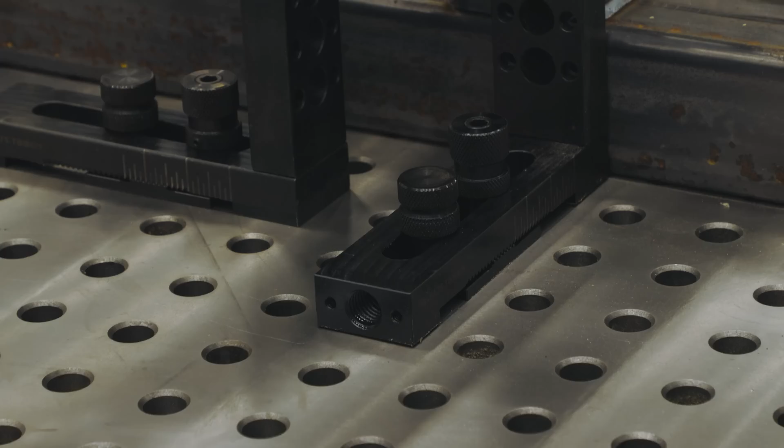Welcome back, everyone. This is part 2 of fixturing a picnic table. As you can see, I have the whole thing fixtured up, and I want you to take a real quick look at it. It's pretty wild looking, might be a little confusing, but I assure you, I'm going to show you where every fixture goes and why I put it there.

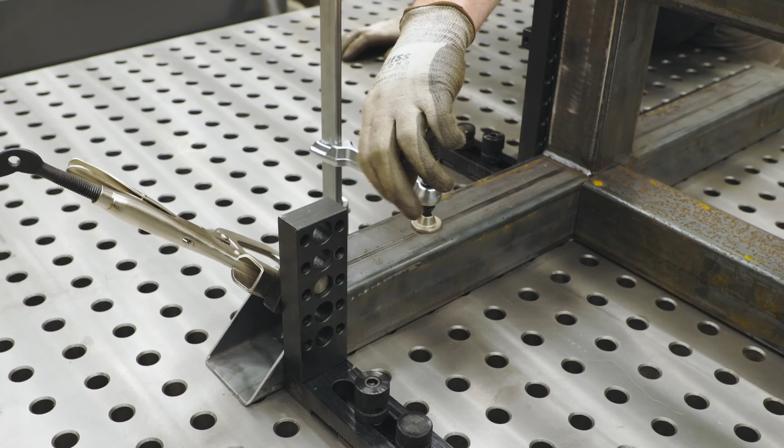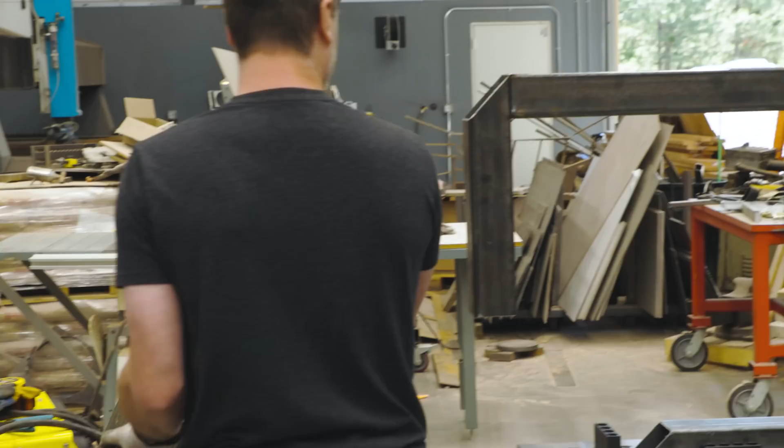So let's take this thing apart. If you haven't watched part 1 of this fixturing of the picnic table, I highly suggest you do that because I cover a lot of basic stuff in that video. In this video, I'm going to be really talking about going up, getting off the welding table and how we're going to deal with that problem. And also, if we have a weldment already that exists, how do we locate that?

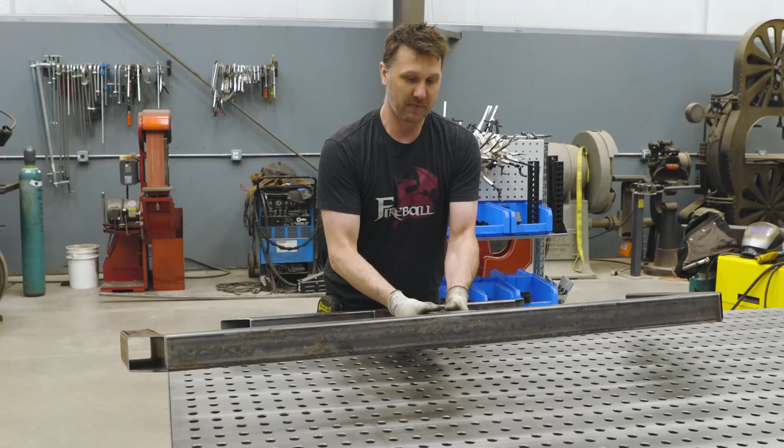Okay, put this guy on the floor. So where should we get started? This is the frame that I built in the last video. I built it flat on the table. And it actually goes like this when you go to sit on it. Your butt sits here, the tabletop sits here. But I'm going to actually fabricate with it upside down.

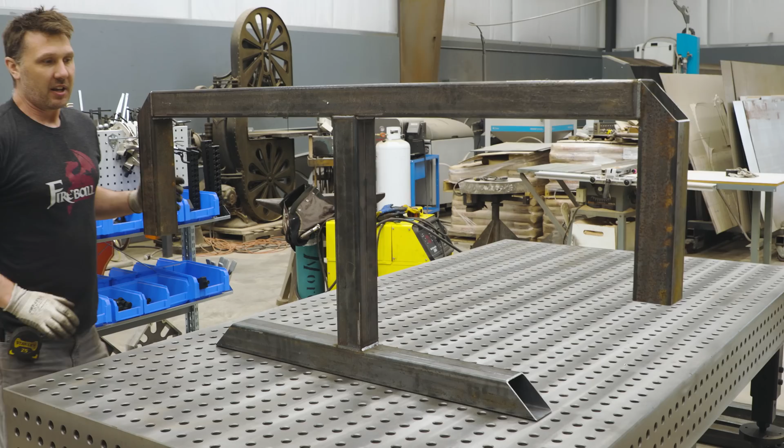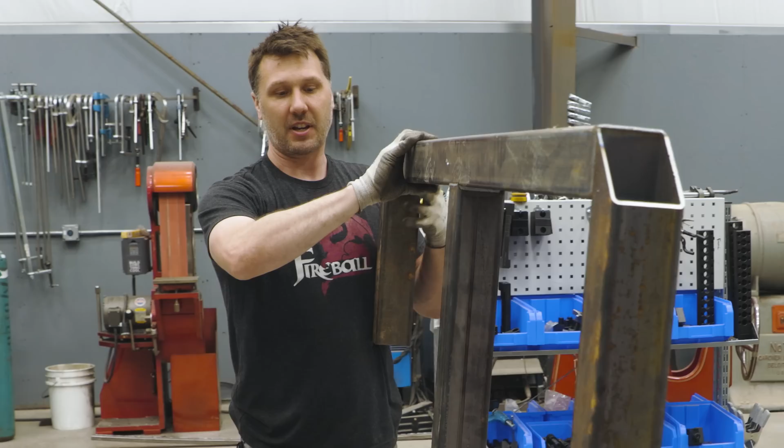So what I have to determine is I need to keep the twist out of it with relationship to the other one. I need to keep the roll or the tilt. I don't want it to tilt this way. And I don't want it to tilt this way. And then I also don't want it to be this way.

This tube is the most important piece. So I'm going to base all my fixtures off of trying to keep this plumb. And I mean plumb, I mean square and 90 to the table. I really don't care if it's plumb or not, just as long as it's square to the tabletop. So let's grab our drawings and we'll set up all the fixtures to do this.

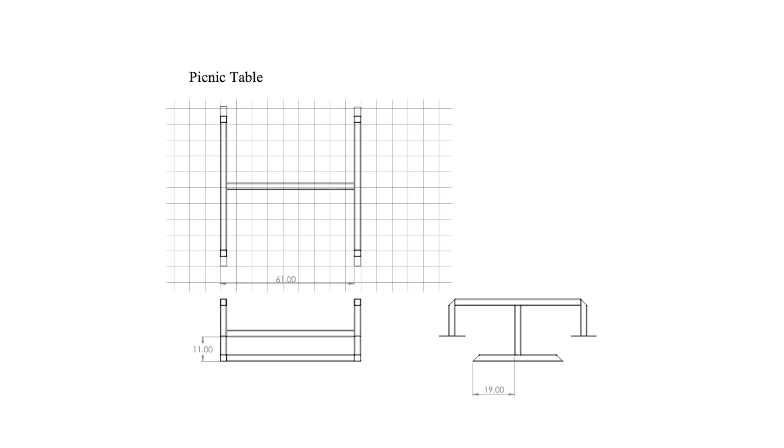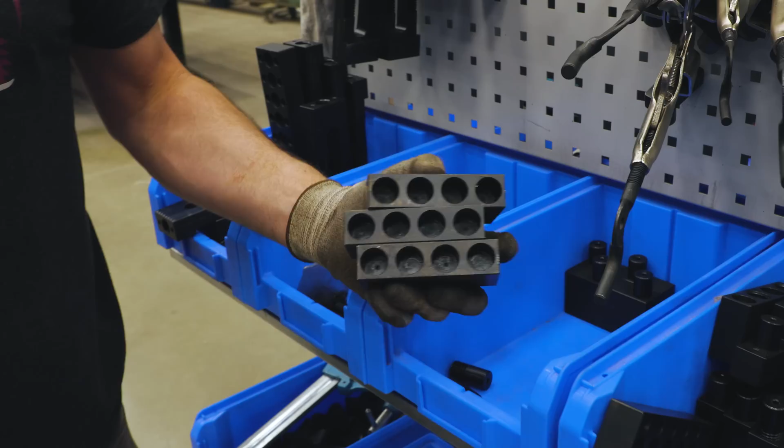Okay, so the first thing I want to do is give myself a 0,0. Much like in the last video, I want to give myself an X and a Y coordinate system to start from. And I'm going to use fence blocks. I like to use fence blocks for this to set up my 0,0. So I'm just going to grab a handful of them.

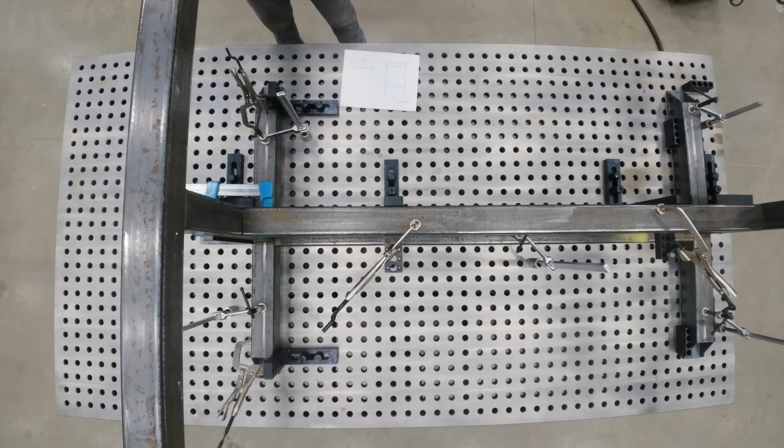And I'm going to give myself some room from the edge of the table in both directions. This is going to allow me to put some clamps and stops or do whatever I need to do. It's always nice to give yourself a little extra room because you might have forgot something to account for. So I'm going to give myself a 0,0 here. And I'm going to give myself a 0,0 in the same grid somewhere up here. It doesn't have to be exact. We can always move them later.

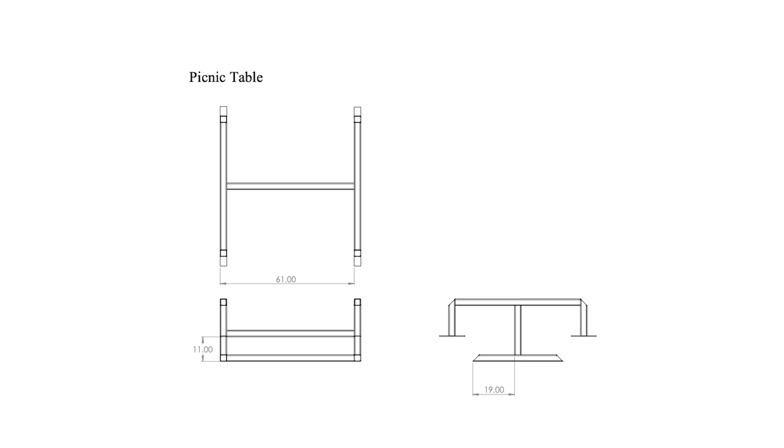And then what I'm going to do with this one is I'm also going to give myself a 0,0, but in this dimension here. Now, when I look at my drawing, it looks like these 2 feet are the 0 point, but really they're not. And what you're seeing here is this elevation here. This says 19 inches from the edge of the tube. Let's get that dimension next.

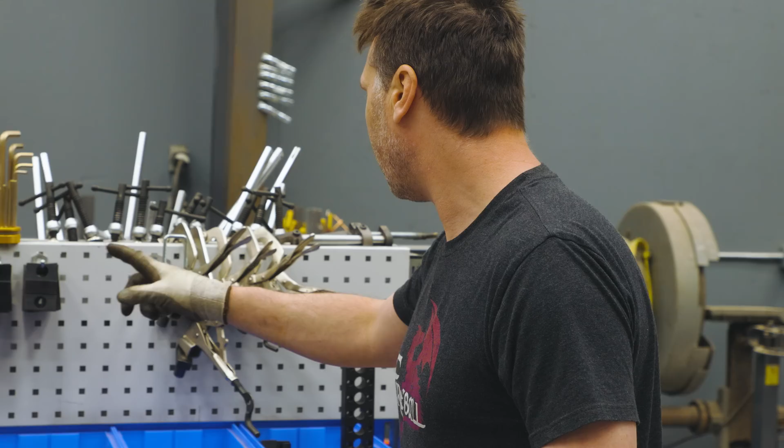And I'm going to do that with this piece. This is my tooth block again. Now that I want to catch this tube, I'm going to have to do some sort of hook. I can do this with my imagination, but it's easier to show you with the tube up here. You're probably going to say, Jason, just butt the tube up into the stop. There's your 0,0.

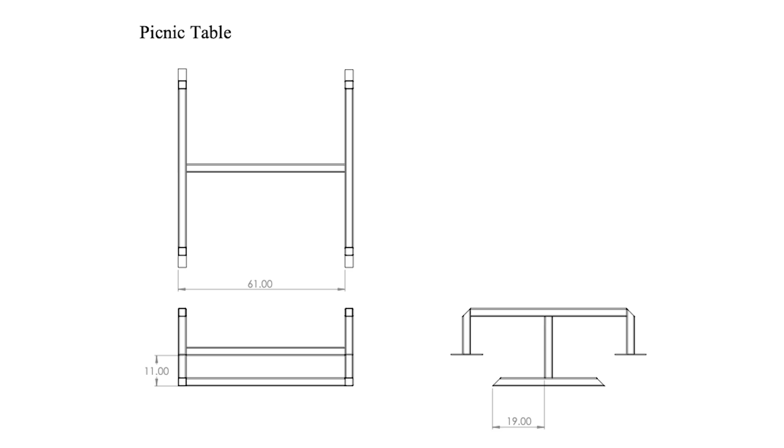In the real world, yes, that kind of works, but what happens if I actually cut this tube a little short? And when I fabricated this, this truly isn't 0,0. Remember, I'm trying to locate this tube, the most important part. So how am I going to get this to be 19 inches from this stop to here? I can't put a stop here. I'm going to need some sort of dog leg to butt this up against.

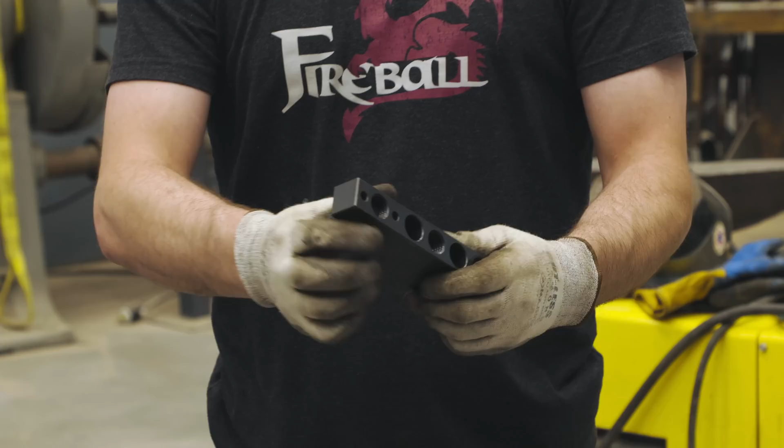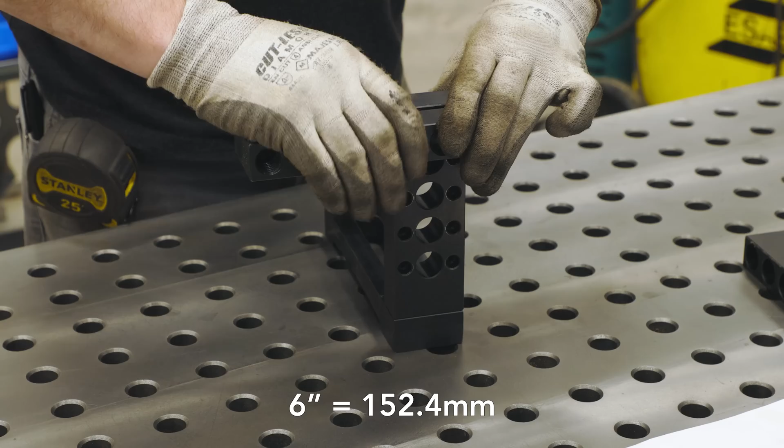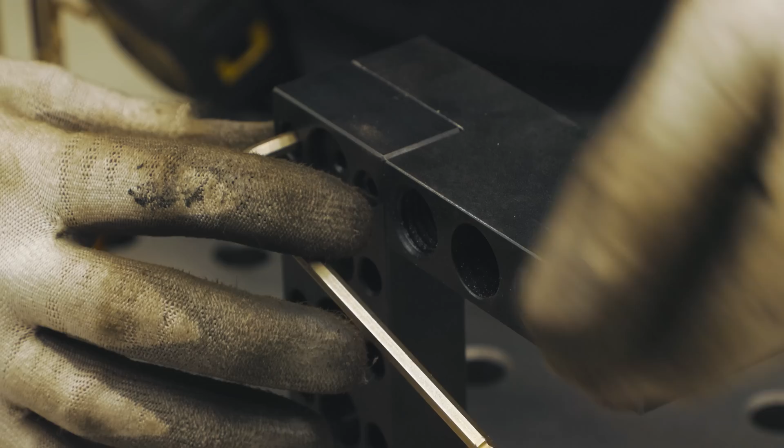So I'm going to use this piece. This is what I call the dog leg block. As you can see, it has this pin and this little offset in here. And what that's going to allow me to do is take this and drop it right on top of this 6-inch riser. It's a nice tight fit, just like that. And as you can see on the back side here, I can put 2 screws in and I could lock it down. I have it in the highest hole because it's going to be positioned over the weld and I want to give myself a little room to weld.

So now I have an offset. Remember, I'm trying to get from 19 inches from this point to this point. So as you can see, now I have a stop. I'm going to put my tooth washer underneath it, drop it down in the hole.

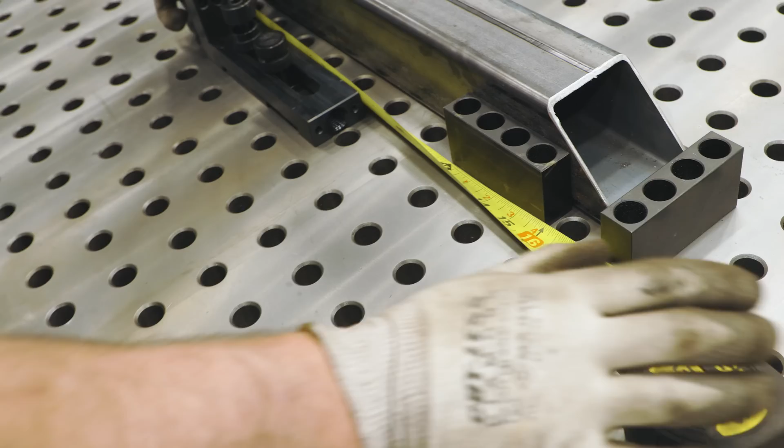Now I have this tube steel here to help visualize what this is for. I really don't need it to be there, but I think it helps you guys understand what I'm actually doing. So now I need 19 inches from here to here. I can see that I'm at 18 inches, but I know this is 1 inch longer, so I'm at 19.

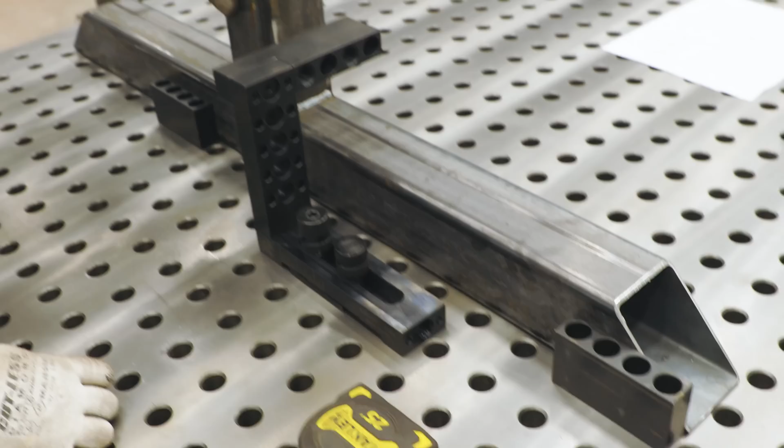All right, so now this isn't doing anything. Now I have my stop. So now this fence and this fence are keeping this tube from twisting. This fence is giving me my 19 inches, just like that. Or technically, this could be called 0, 0 now, because everything's pulling off here.

When I start welding the tubes inside here, I'm going to be doing some fillet welds, so I want fixtures on the fillets. Technically these are on the wrong side, so I'll just move them over here. This is the hard stops. I always want hard stops on my fillets. It's going to really help with the distortion. If there's clamps over here, something could go wrong with the clamp, it could not have been tight.

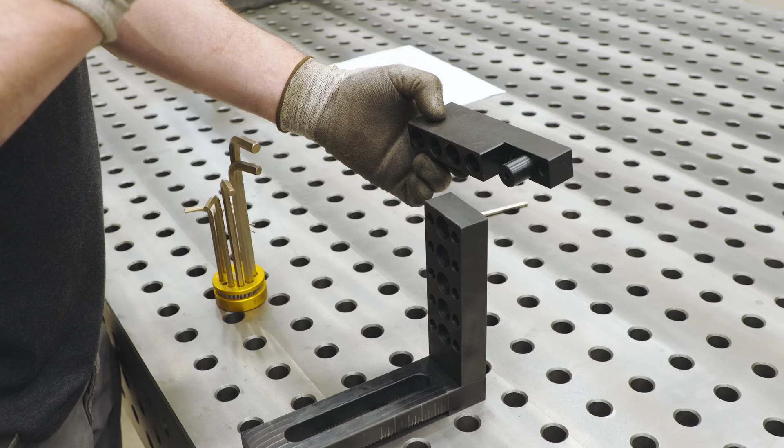It's good practice. Now what I need to do is match this piece exactly on the other side. This block is reversible. I can choose it to go this direction, or I can choose it to go this direction, and we'll lock it into place. My drawing says I'm gonna be 61 inches apart, so we need to make sure that we cover 61 inches, and we'll just do that with the tape measure.

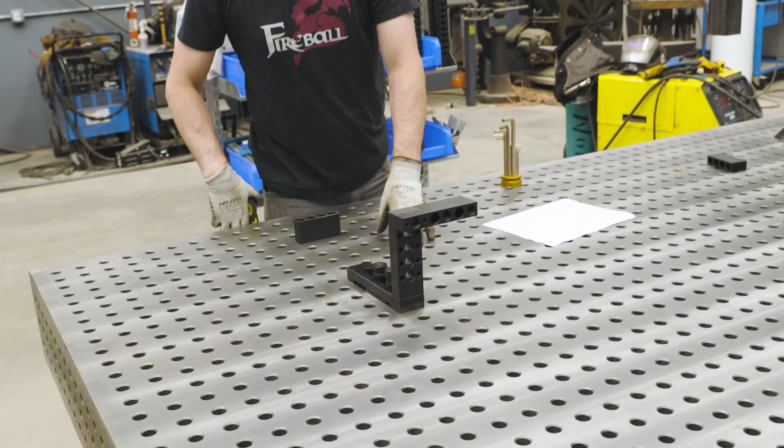61, so I'm just gonna position him right here. Here's my 0 line right here. Put the block in the same grid. I looked at the other block on the other side, and all I need to do, I don't even need to measure, is just match up the same line right there. And if I pull a measurement, we should have 18 inches, which I do. Plus 1 is 19.

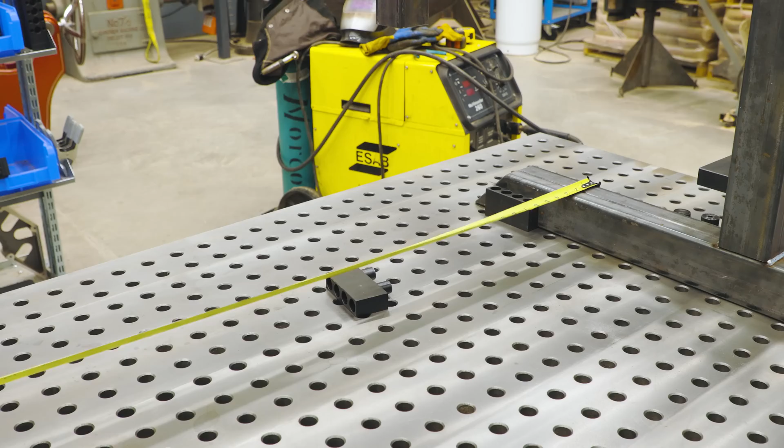Now we just need to set up that same 61 inches to control our twist over here on this side. So fixtures on fillets, let's set it to 61 inches from 0. I like to just give myself an eyeball. And like I said before, always 2 pins for alignment. I like to put the alignment pin in the back and the lockdown bolt in the front. So 61 from 0, right there. Lock him down.

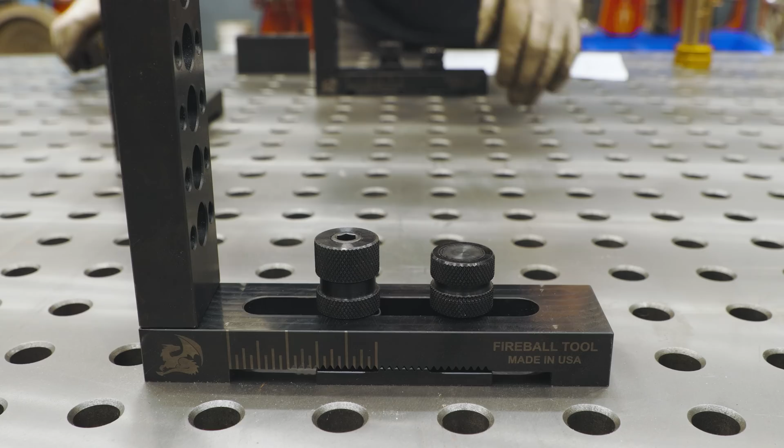This guy can kind of go anywhere I want, I can pick any row. I don't need the tape measure to tell me where I need to go now. I just need to match the scale on the side to its brother over here, which puts me right there. And if you're really, really, really worried about it, you can always pull the tape measure. Looks good, they're identical.

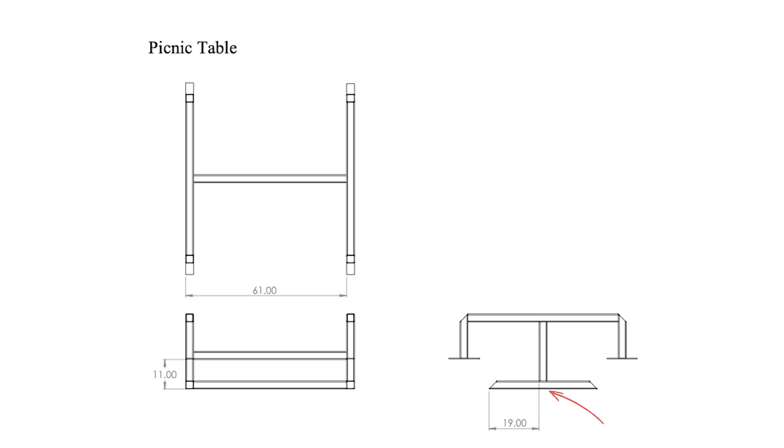Now let's look at this. So I have 2 cross tubes. One is set at an 11-inch elevation, we won't worry about that yet. We just know we need to be at the 19 inches where the center line of this tube is. So let's set up 2 fixtures to get up in the air, and I'm gonna do that with this. This is the standard tooth block base.

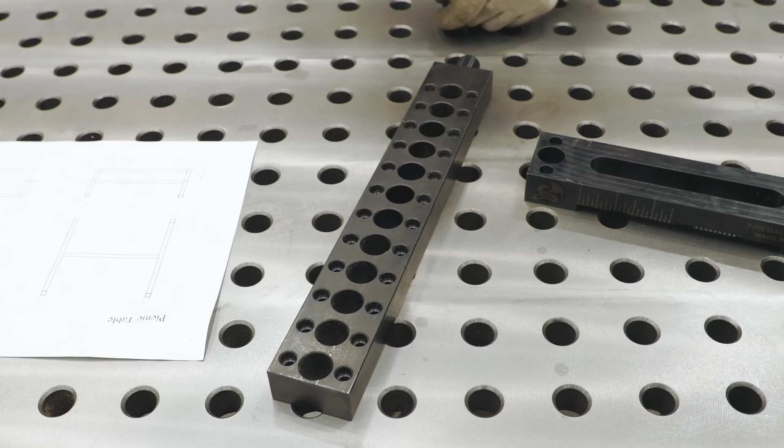So instead of the 6-inch riser that I've used before, I'm gonna go with the 13. And he just goes in here like this, and we're gonna bolt him together. I really like this system because I can configure the tooth block the way I want it. If I need more 13 inches, I can configure them that way. If I need more 6 inches, I can go that way also. So I don't feel like I have to have 30 of one style, I can have a pretty versatile system.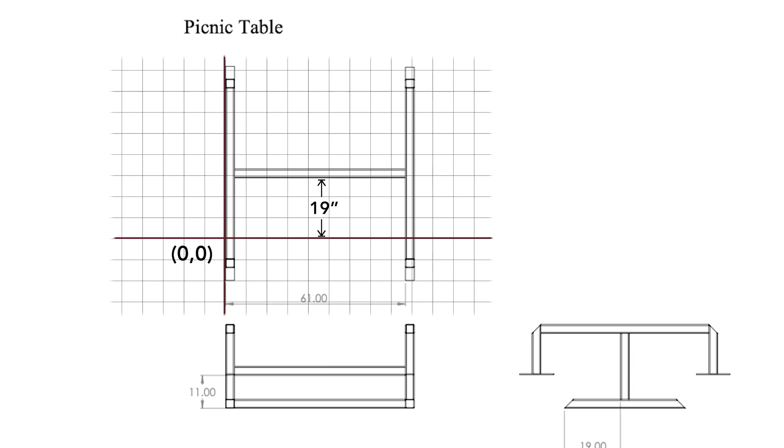There's an imaginary line that runs right through the table. Remember, this is 0, 0, and I just need to be 19 inches off of that. I'm gonna position him about 12 inches away, because remember, I'm gonna be doing some welding in here, and I don't want this fixture to get in my way of welding. So I'm gonna pull him back.

I like to get everything kind of situated, and then I can put a fence in here, because remember, this is my grid line. And if you want to, you can just use the tape measure to bump it up. Each one of these teeth, remember, are on 1/8 inch increments, so it works out in my favor right there. So now theoretically, this surface of this face is the same exact surface as this side of the tube. So we're making ourselves a nice line in here.

We're gonna do the same thing to this one, put a block under here. The second one's always the easiest because we can just match what's on the other side, and I can see my mark. What, did I nail it right on the first try? Just to confirm, I always like to confirm. Nailed it. All right, those 2 are in the same spot. Everything's looking really good.

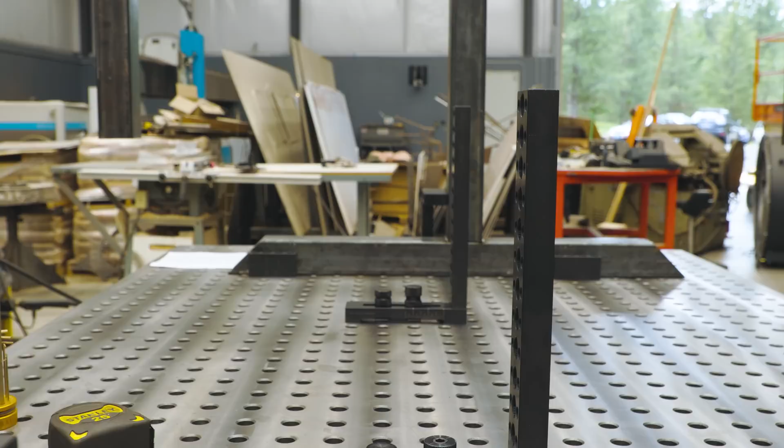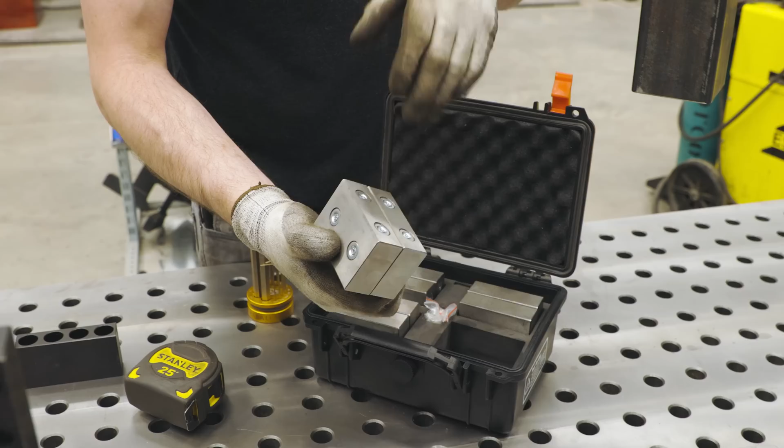So if we look at our drawing, we got one tube that sits on the floor, one that sits in the air. Now it says 11 inches, but I'm actually going to cheat. What I mean by that is I'm going to space everything up on blocks. I like to use these 1-2-3 blocks. They're completely solid, no holes in them, and they have magnets.

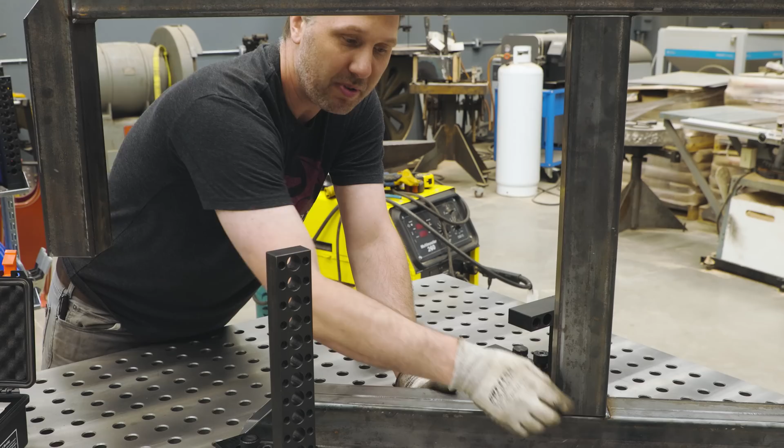So everywhere where there's a tube going, I like to put a riser. Why do I do this? I like it because it eliminates any errors or variation in the tube. When I go to do some welding, it gives me a little elevation so I can run the bead all the way down to the end of the tube without worrying about making contact with the table. It also lets me put a piece of sheet metal underneath the weld if I'm going to get really blobbery.

So we'll put a couple blocks down, just like this. Even though that dimension says 11 inches, I know I actually need to be 12 inches from the floor to where this cross tube is going to sit. And remember, this cross tube is going to hang up here in the air, right? Something like that. So we need to put the shelf right here.

So I have three different ways to make a shelf. The first one is just a simple pin or stop. I'm lucky because it's 12 inches, and one of these holes is probably going to be exactly 12 inches. Did I nail it? I did. I lucked out. Okay, so now the material could sit right on top of this peg, and that works.

Another solution is this one. This is the same riser block we've been using on everything else, and it's got that 3/4 pin. If I put that in here, we're also going to get 12 inches from the floor to the end. But what I like about this one is, see those tapped holes in the bottom? I can permanently stick it there and bolt it into place. One of the reasons I like this one also, it gives me a place to put a clamp, to clamp and strap over the tube a little later. That's a really nice feature where the other one doesn't allow me to do that.

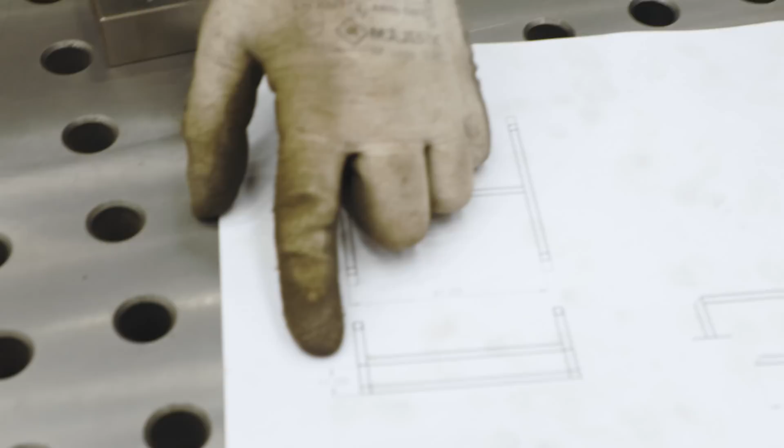Or the other option—maybe it doesn't land on an exact number like 11 or 12, maybe it lands on something weird—we can use the riser and configure it with the block again. Then we can put it on here and adjust the elevation.

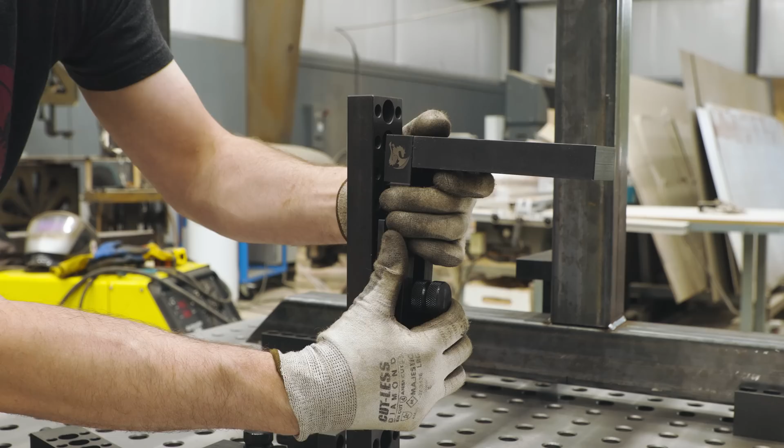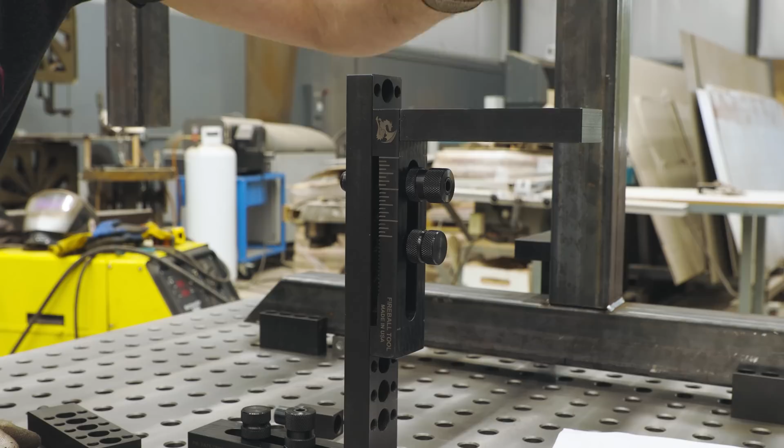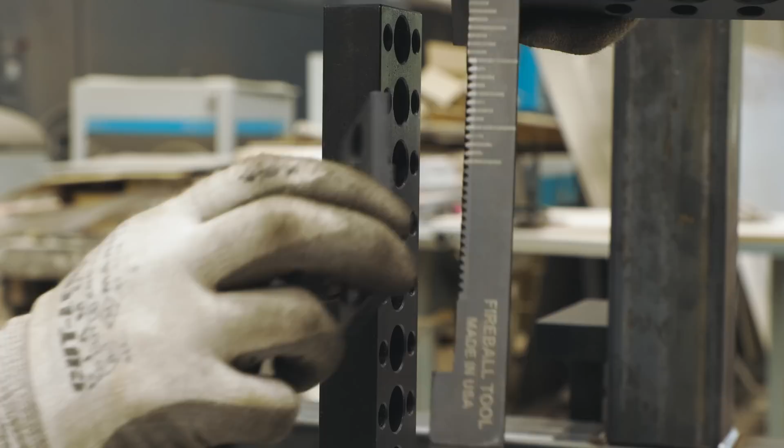I'm going to show you something. So if we remove this washer, what will actually happen—and I don't care how many bolts you put in here—you start hammering down, putting any weight on here, see, the potential to slide is there, and I don't like error. So I'm going to use the tooth washer, and it's going to solve that problem of this thing potentially sliding. It jumps the teeth in 1/8 inch increments so you can get those weird measurements.

That's the beauty of this tool right here. So I don't even have the nut or the bolt tight, it's just there, and it's not going to slip. We tighten it up, and it's not going to sag or slide.

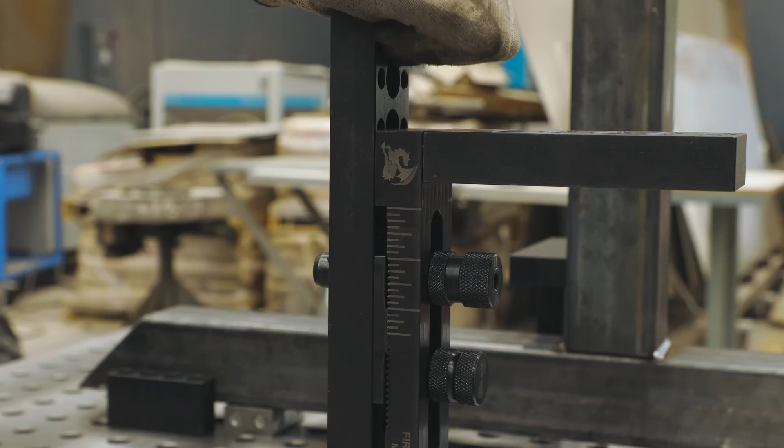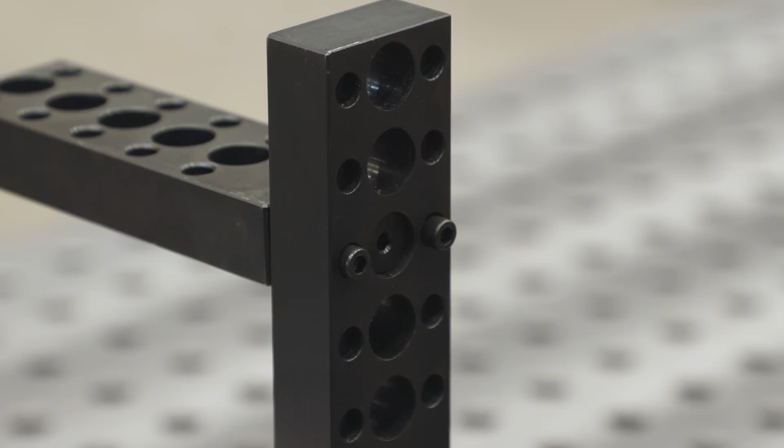I'm going to keep it simple, and I'm just going to use this guy right here, and confirm that he's at 12 inches. That works out great. Also, the bolts in the back keep the twist—see how it's wanting to twist? Two socket-headed cap screws will prevent it from twisting.

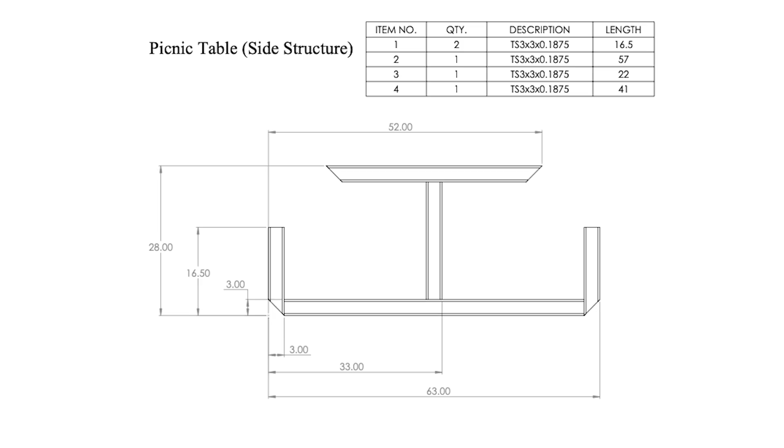So I know some of this might seem a little excessive, but I guarantee this would speed up your process. Imagine getting an order from the US Park Service for 200 of these picnic tables. The first one you could do by measuring it all out using squares, carpenter squares. You could do the first one pretty quick, but the extra time it takes is going to cost you in the long run.

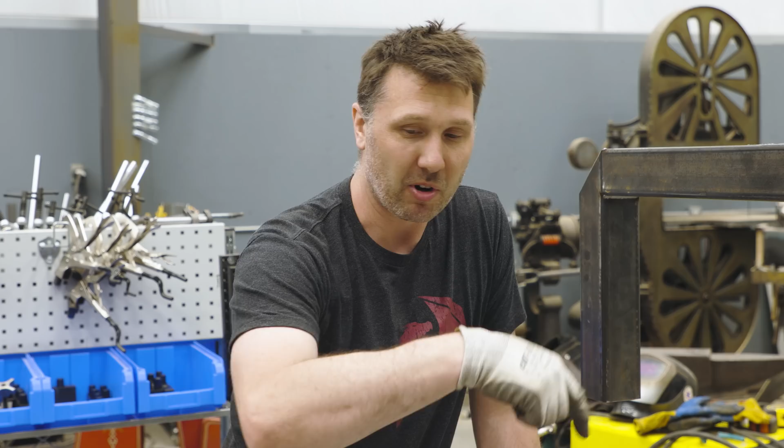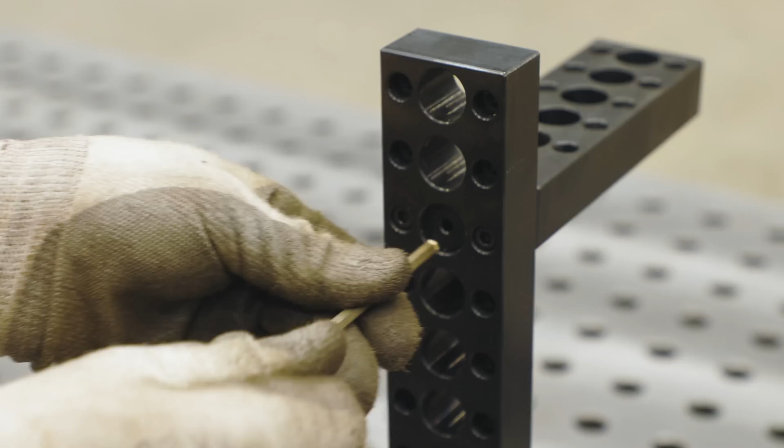Whereas this way, you're spending more time up front to really smooth the job and get things done fast. And that's the beauty of a fixture table—we're setting up parameters for ourselves where we don't have to use the tape measure anymore. We could just put our material in and start tacking.

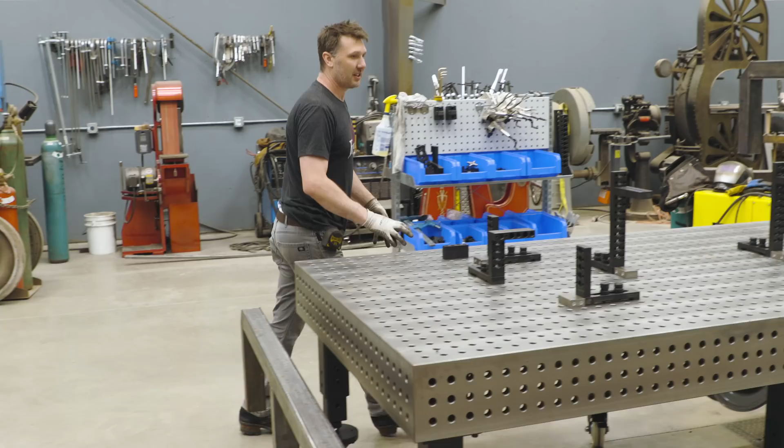So I'm going to set my material up here, and show you the next fixture we need to set up. See, this doesn't really look all that complicated now, does it? We've got some fixtures in the middle of the table. It's not looking that bad. I'm going to slip him in.

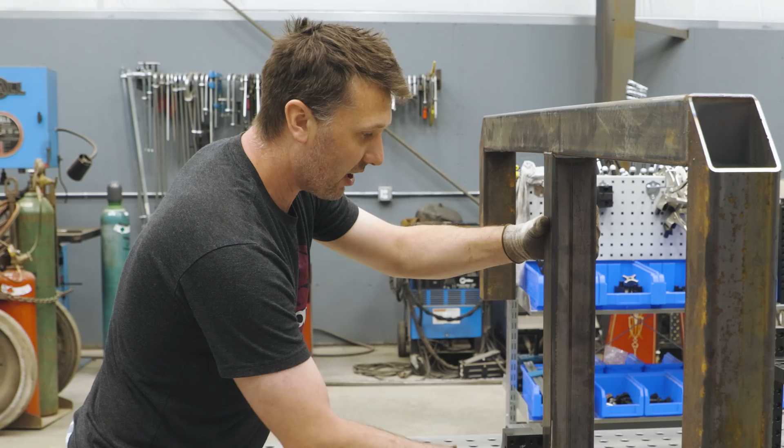So I want to roll him into that stop, just like that. You're probably gonna say, Jason, isn't this stop right here gonna keep the twist out of it? Well, it kind of is, but I don't trust this tubing to be perfectly square. And remember, everything I'm doing is based off of this tube, so I'm gonna need a square or a stop right here to keep it plumb.

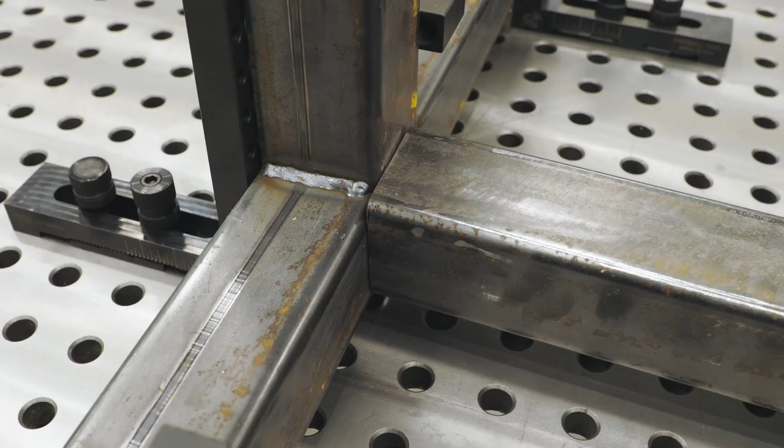I'm gonna just use the 13-inch riser again. Now I got a good square, something I can clamp to keep them from rolling in. Now the way I have this set up is that if this tube was cut too long or too short, it will not go in between here. And I cut these tubes myself, and I know that I cut them a 1/16 under, just because I don't like fighting anything. Look at that.

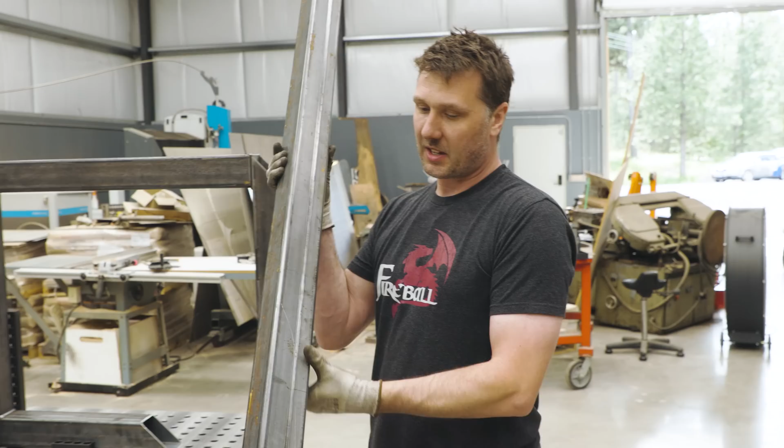So remember our stop there? It gave me a stop. I'm raised up off the table with my shim. And now when I go to weld this, I can get all the way to the bottom of the corner, put a little piece of sheet metal underneath there to catch any spatter. It looks great. Remember, we're upside down, so I like to put the weld seam where you're not gonna see it. So weld seam goes up, and if this was cut too long, it would not fit in between these 2 points. Fantastic, it looks really, really good.

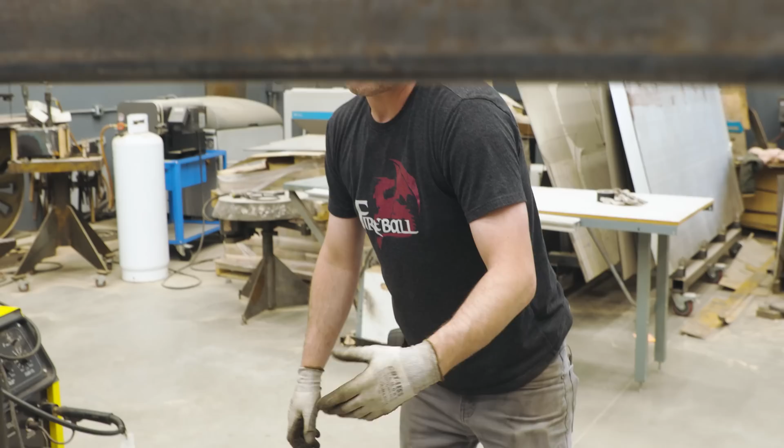But nothing's really set into place, so we need to put our clamps down, and I'll show you where I like to put the clamps. We'll use them all. What we don't use, we'll put back.

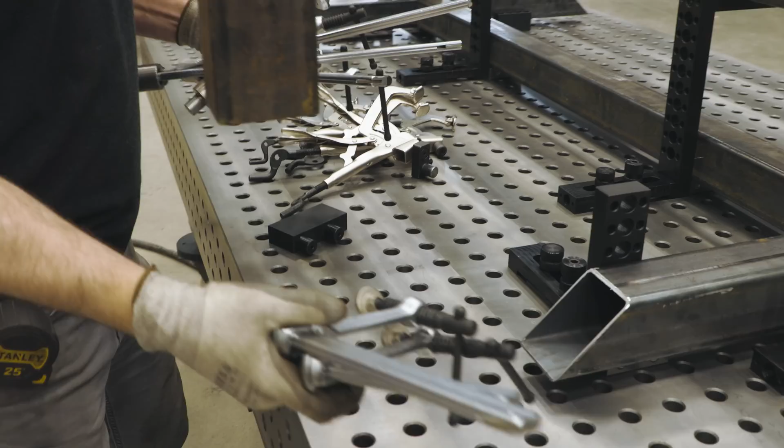When I do my clamping, I want to make sure that I'm clamping down to the table, but I also want to clamp back to the fixture. So in 2 locations. And I'm going to always try to clamp right on top of my block. And I'm going to try to position my clamps far away from the corner where I know I'm going to be welding, because I don't want them to get in the way.

Make sure I'm up against my stops. I like to grab these guys for this application because it points the handle straight up into the air. Nice, nifty little package, and that really holds this tight.

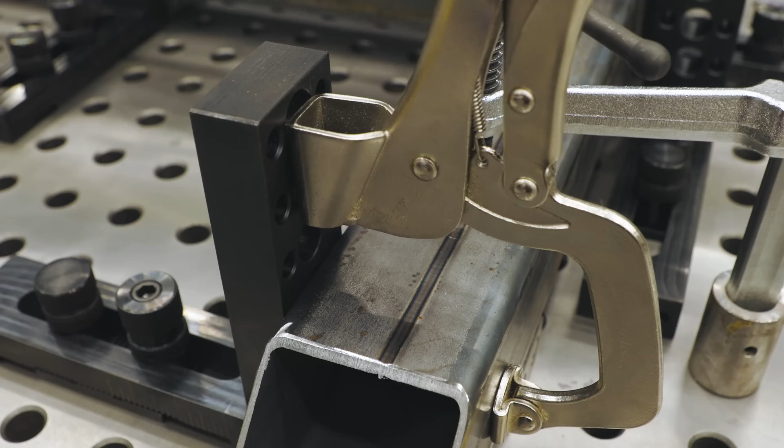So once again, I like to fixture on the fillets. This is a fillet weld, or a T-joint. This tube and this tube are gonna want to try to pull together and marry themselves when they go to weld this. So these two hard stops are really gonna slow that down.

If this fixture was on the other side, it's gonna be relying on my clamp, and I don't know if this clamp is strong enough. It might actually stretch a little bit. So it's just good practice. You can't do it every time, but if I can, I try to do it.

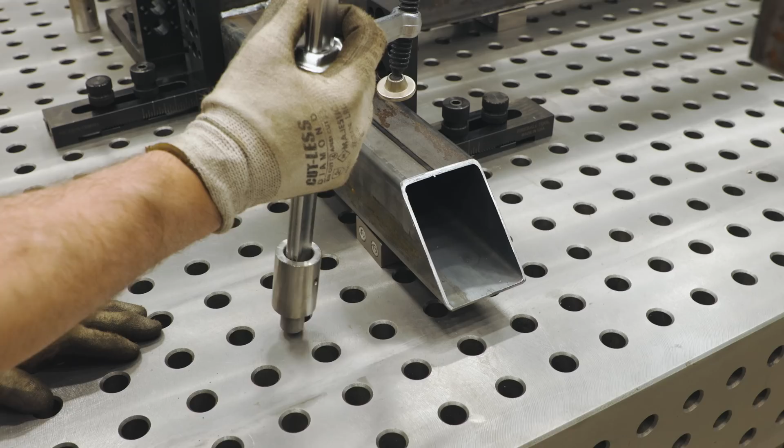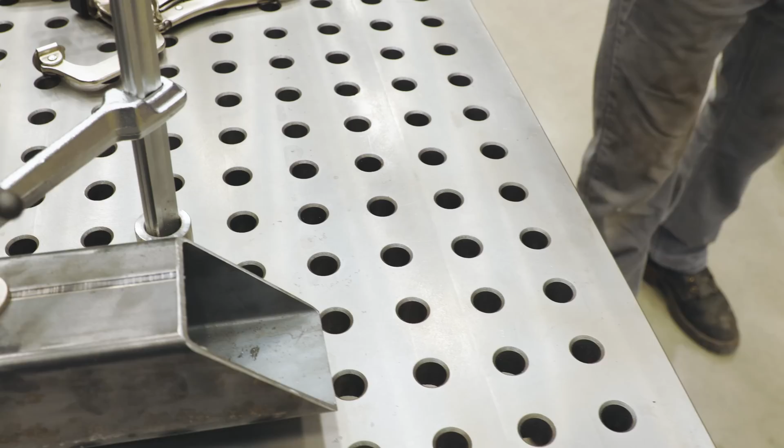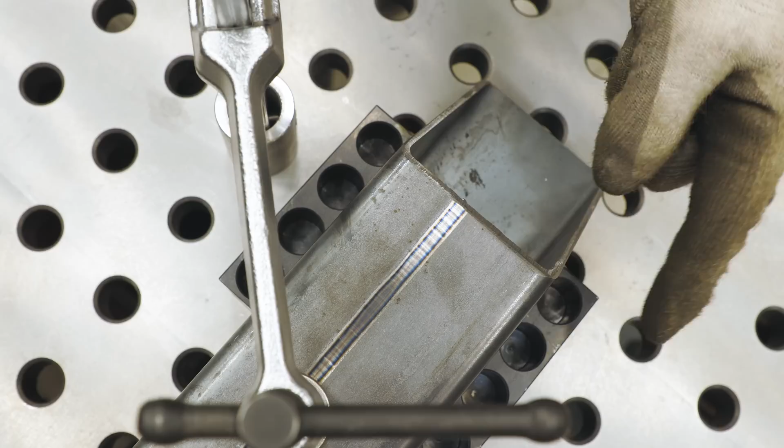Nice and secure, and I'm just gonna go repeat the other side. So this side doesn't have the same riser like we do on the other side, I just have a hard stop. But I know that this is 3-inch material, and what I'm gonna do is use this block right here, and it's going to literally box in this tubing. If this was any other diameter tube, I would have to use my riser or a side pusher clamp to do this. But I've got it boxed in now, so I know it can't move.

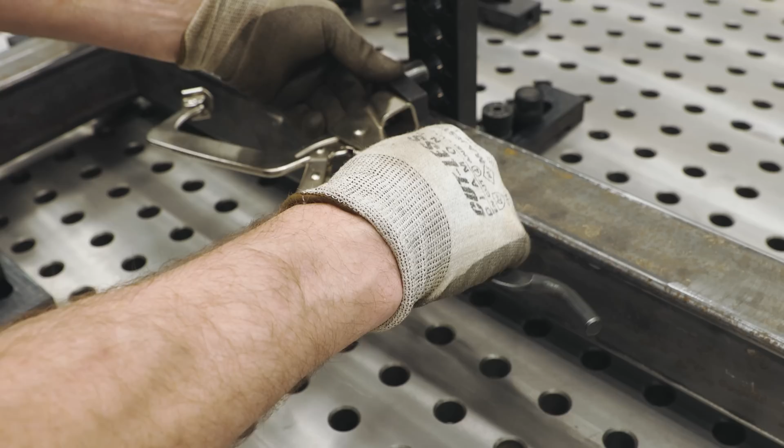So all I need to do is just push down. So the next thing we have to do is clamp down these two tubes right here. I'm gonna side push it with this clamp.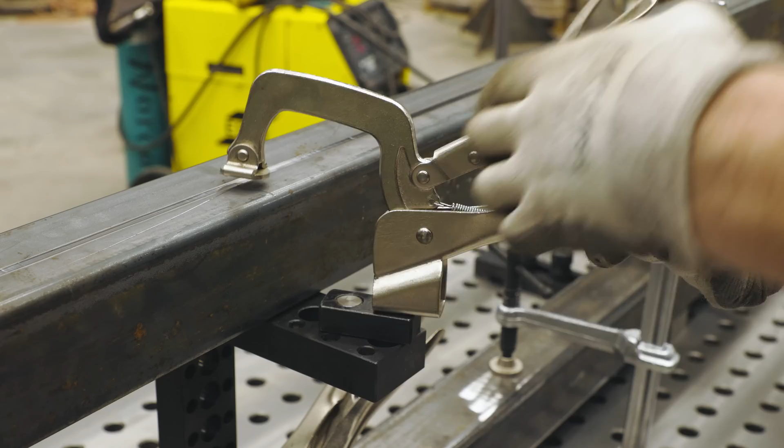And then we're gonna just put one right here in the middle, hold them down, and use this guy right here. Remember I said before, this is why I like this. And if you can see how I can position this over here off the side of the clamp, what's gonna happen is this is gonna want to pick up, it's gonna want to teeter-totter. So if you can bring the clamp over and clamp it right over the top, something like that. If you happen to have a tall clamp, you can bypass this altogether.

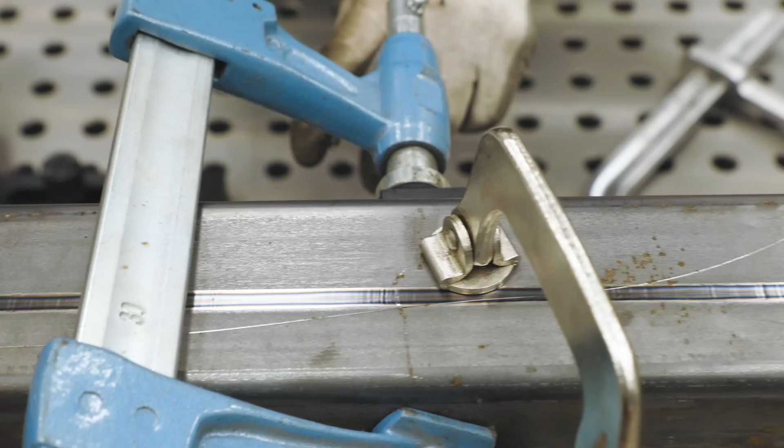You can do that. Lots of clamping options. Another option too is just to use your regular clamps, grab the tube, and then hold it back to the fixture behind it. It's a great solution. Doesn't take a lot of pressure.

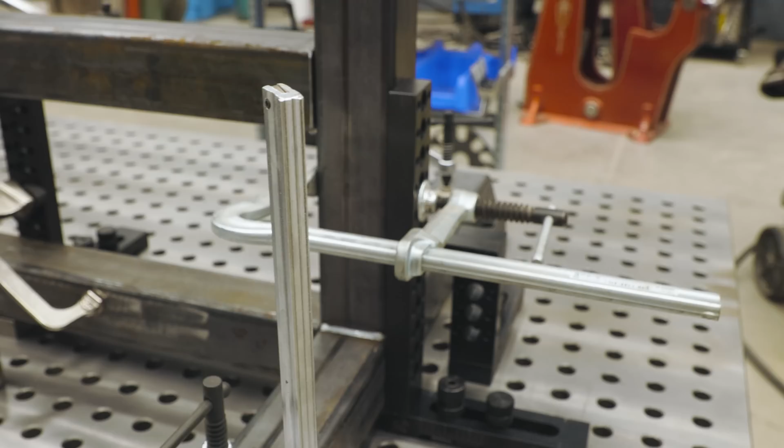Just like that. We did it. It's all clamped and fixtured and ready to weld. This might seem excessive, but if you had 200 of these, from here on out, you just have to remove clamps and drop in your material and tack, tack, tack, and this thing would be ready to go.